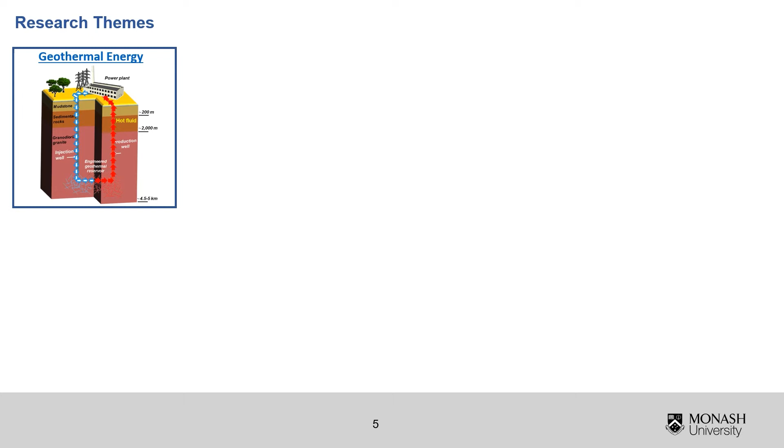The primary aim of 3G Deep Group, as I mentioned here, is to harness new and more sustainable forms of deep earth minerals and energy resources. We follow UN Sustainable Development Goals 7, 9, and 13 in all the projects carried out at 3G Deep Research Group. In 3G Deep Research Group, research works are carried out across a number of research themes such as geothermal energy, waste to wealth, CO2 sequestration, coal seam gas, shale and tight gas, hydrogen as a fuel, coal gasification, deep mining, and gas hydrates.

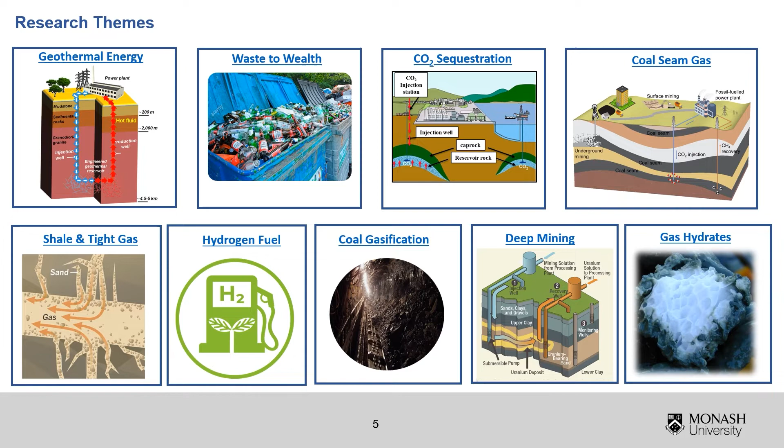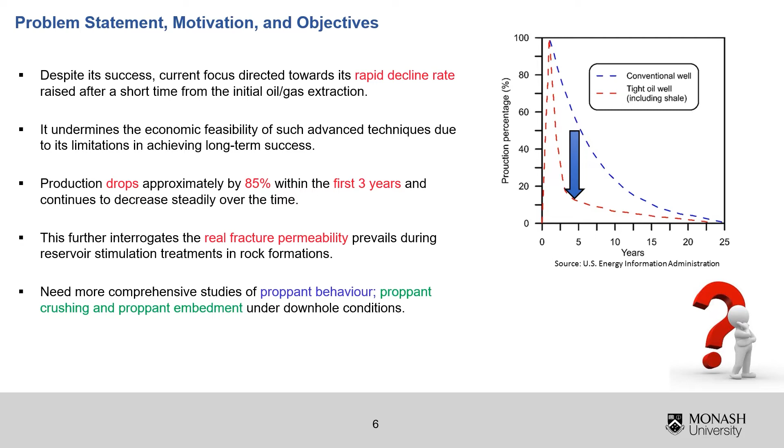Now, I will move on to talk a bit about the research work I carried out at 3G Deep Research Group. When conducting advanced reservoir stimulation techniques to extract oil and gas from deep unconventional wells, a rapid decline rate is often raised after a short time from its initial extraction if you compare it with a conventional well. Generally, production can drop by 85% within the first 3 years. The reason behind this significant production drop is the occurrence of major proppant degradation mechanisms within deep fractures such as proppant crushing and proppant embedment.

Proppants: it is a granular substance. What we do in stimulation techniques is we inject proppants along with the fracturing fluid at a high pressure. So what happens is these proppants go in between fractures and keep the fractures open, withstanding high prevailing in situ stresses in deep underground. But these high in situ stresses cause proppants to crush or embed into the fracture, causing an increase in the flow path tortuosity or reduction in fracture aperture, ultimately reducing the fracture permeability. So my PhD research focus was to understand these two major proppant degradation mechanisms, proppant crushing and proppant embedment.

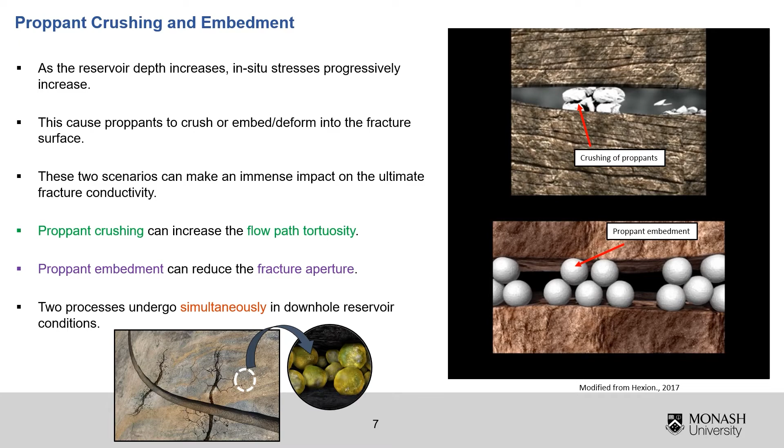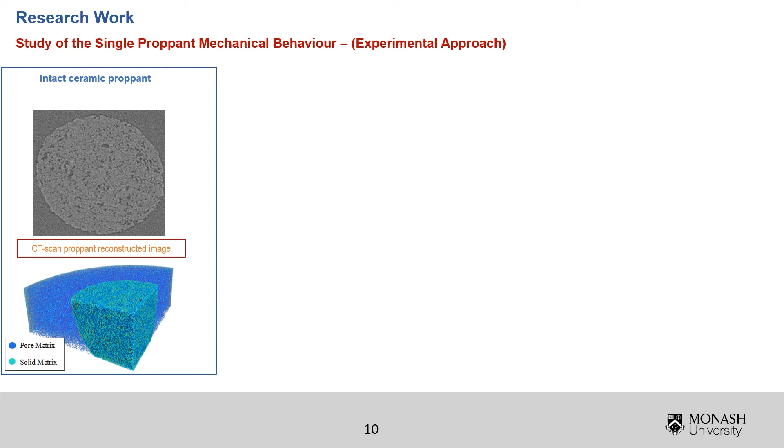3G Deep Group has developed unique experimental facilities in the 3G Deep Research Laboratory to conduct advanced experimental studies. Following are some experimental setups I utilized to carry out my experimental work. Let me now talk about my PhD work. I initially carried out a number of studies to understand the single proppant mechanical behavior. We performed micro-CT scanning coupled UCS testing on single proppants to analyze proppant microscale pore variations when they are subjected to higher levels of loading. Also, we studied the proppant breakage mechanism using advanced experimental techniques.

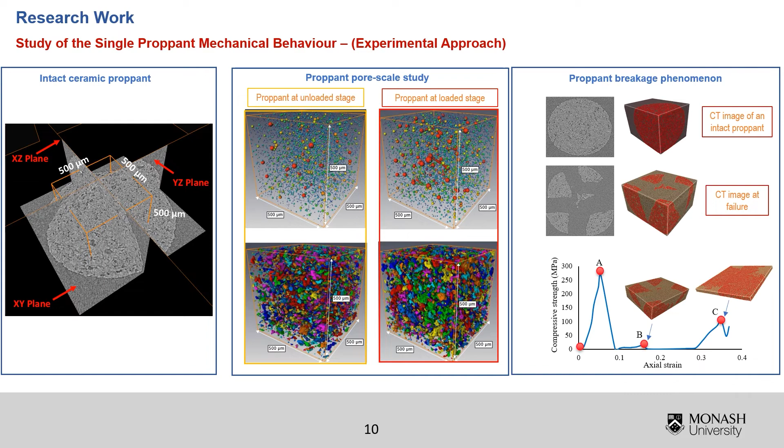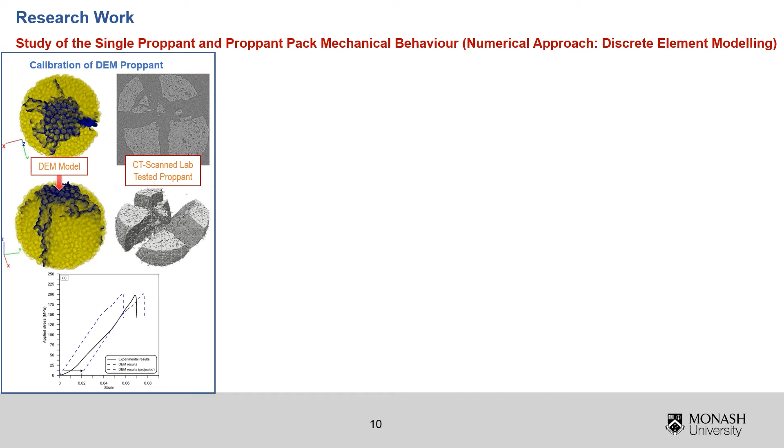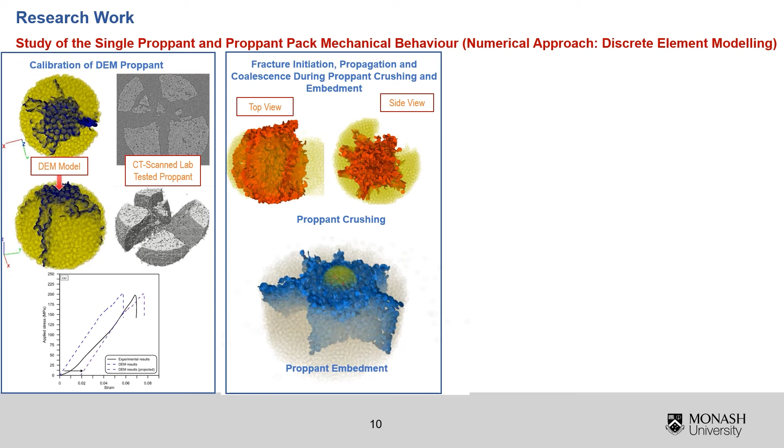Furthermore, I used the discrete element modeling numerical approach to understand single proppant mechanical behavior. We accurately calibrated and validated our discrete element models with our experimental studies, and then we used those models to understand fracture initiation, fracture propagation, and coalescence processes undergoing when proppants are subjected to proppant crushing and embedment. Later on, we further expanded our discrete element models to investigate proppant pack behavior and the proppant pack rearrangement mechanism occurring when they are subjected to advanced loading environments.

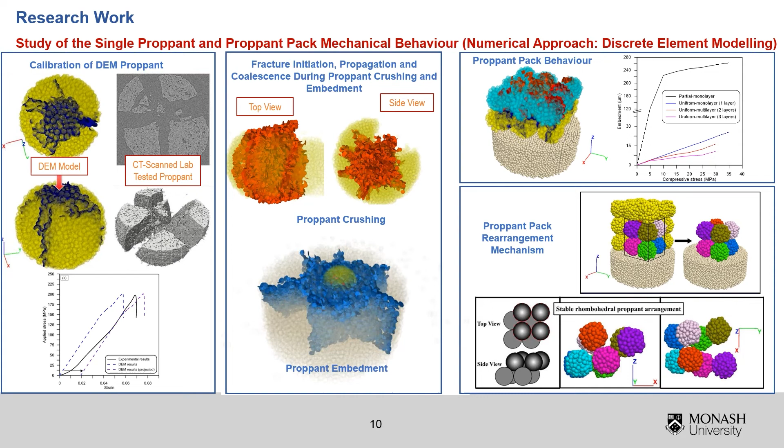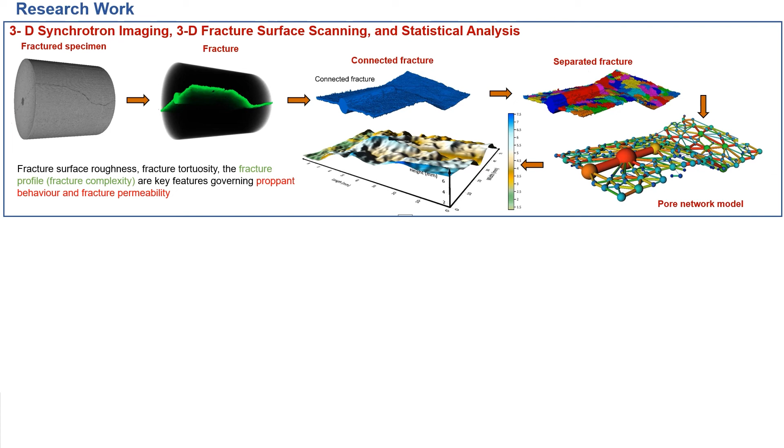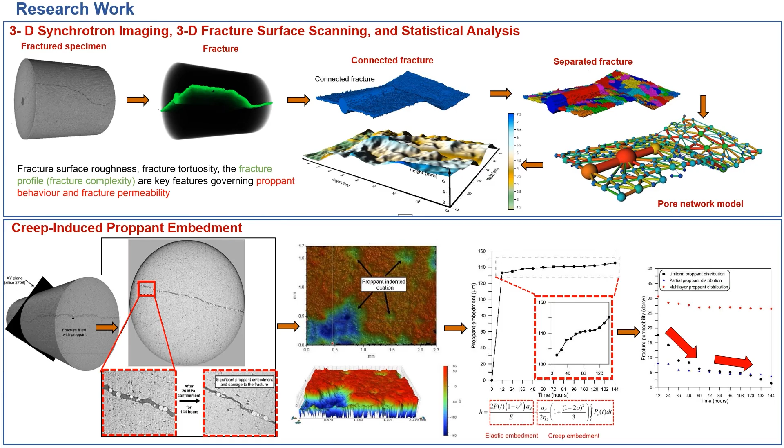In addition, we also performed 3D synchrotron imaging, 3D fracture surface scanning, and statistical analysis techniques to understand the impact of fracture morphology and characteristics of hydraulically induced fractures on proppant performance. Furthermore, we also carried out synchrotron imaging coupled long-term permeability testing on proppant-injected fractures to study creep-induced proppant embedment and time-dependent fracture permeability variation. The extensive research work I carried out at 3G Deep Group enabled me to publish and co-author a number of journal articles in renowned journals.

I have been immensely fortunate to be a part of 3G Deep Group and work under the leadership of Professor Ranjith Pathegama. His undivided attention, his guidance, support, and continuous encouragement helped me to achieve success throughout my PhD candidature.